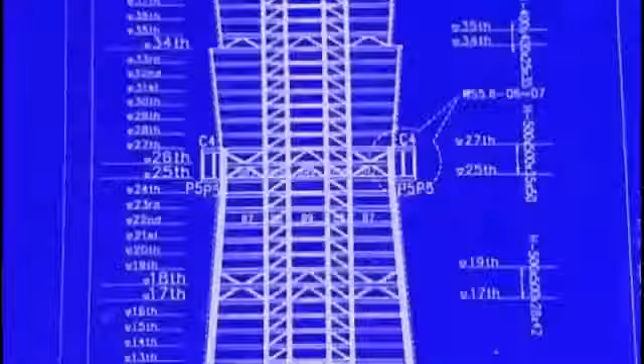Taipei 101, the world's tallest skyscraper. 508 meters of the most high-tech engineering and construction on the planet. Mixing ancient values with cutting-edge technology and taking the heart of Taiwan into the future.

Designing and building the world's tallest skyscraper is no easy task. But here in Taipei, two of the most powerful forces of nature, earthquakes and typhoons, combine to make going super tall a super challenge. I mean, any tall building in the world is a feat of engineering.

Using world-leading engineering and construction techniques, Taipei 101 not so much conquers nature, but outsmarts it. This is the only super tall building in the world that's designed in a seismically active zone. This has never been done before, certainly not to this scale.

The result is a man-made marvel, a unique megastructure of unprecedented size, shape and technology, built to withstand the very worst that nature can dish out. I, for one, I'm a structural engineer. If there's going to be an earthquake in Taipei, I want to be in this building. I'll choose this above all else.

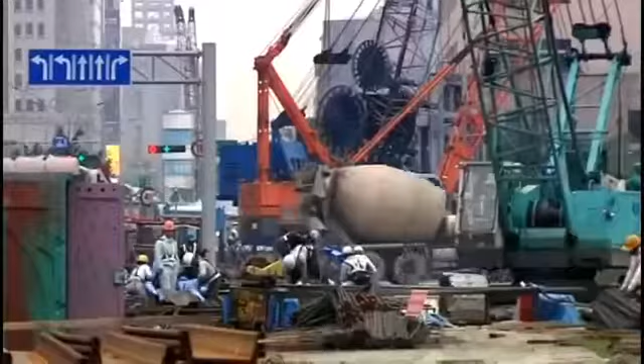If you're looking at the history of skyscrapers, really you begin in America; Chicago and New York are the classic cases. But in the last, let's say, 10, 15 years, Asia's really boomed with regards to the building of large structures. In recent years, Asia has seen an explosion of mega-scale building and industry. The region now holds 8 of the world's 10 tallest buildings. And as modern construction methods and materials continue to improve, designers will continue to aim ever higher. Not because they have to, but because they can.

Developer Harace Lin is one of the most powerful and successful businessmen in all of Taiwan. A member of a major construction dynasty, for him, Taipei 101 is the result of a lifelong ambition. Since I was a boy, I have dreamt that one day I would build a great building, one which will benefit later generations for a very long time.

For Harace Lin, Taipei 101 is more than just a building. It's a statement on Taiwan, its people, and its future. A notice to the rest of the world that Taiwan has the technology, the industry, and the determination not just to join the giants of global industry, but to lead them. There's no better way, really, of getting global attention than building these super tall buildings, particularly if it's the highest in the world.

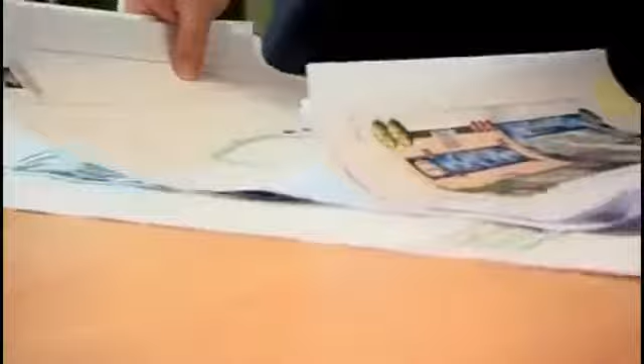Initially earmarked as the centerpiece for the growing and glitzy Xinyi district known as Taipei's Manhattan, the primary goal for the building is to be the best, but not necessarily the tallest. Long-standing friend of Harace, architect C.P. Wang from C.Y. Lee & Associates, comes into the project in the early stages. We started with 3 buildings, a 60-story building in the center and 2 smaller buildings that are about 20 stories for the different shareholders.

But plans quickly evolve as key investors clamor to have the building push up, not out. The planned 60 stories soon turns into 88. And with the mantle of the world's tallest a mere 13 floors away, the momentum becomes unstoppable. We truly believed we could do it. That if we worked hard, we could make a building that was visible to the entire world.

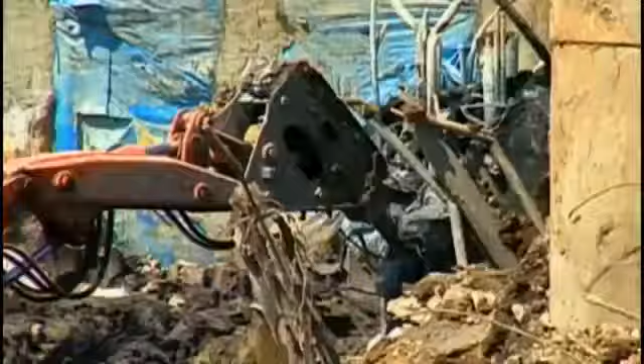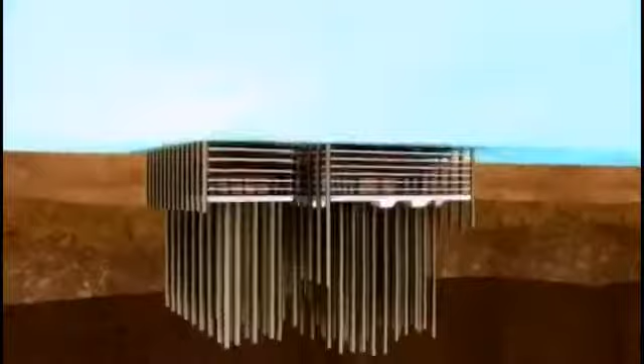But three factors combine to make this project not only the tallest and most visible in the world, but also one of the most difficult to build. Taipei City is an inhospitable place to build a skyscraper. Beneath the earth, a thick layer of soft clay demands uniquely designed foundations. While above ground, the threat of earthquakes and typhoons requires a level of engineering and construction never before achieved.

If Harace Lin wants to make the tallest building in the world here, his engineers and builders will have to confront the power of the earth. Designing a structure flexible enough to resist an earthquake, but stiff enough to resist a typhoon. Contradictory requirements that until now have never been combined. All these different mixtures of elements have to be blended almost superbly in order to make the building achievable.

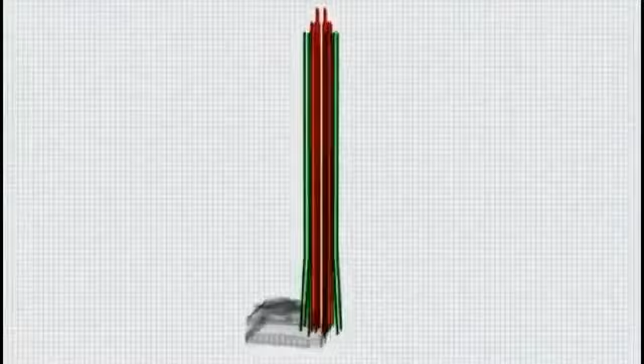The solution will combine two revolutionary systems. First, a braced megaframe joined to 8 super columns filled with a mixture of steel and concrete. And a tuned mass damper, a giant pendulum, the weight of 10,000 people, designed to oppose the effect of wind. The combination of these two concepts is groundbreaking. I am very proud of it, and as architect, you don't get a lot of opportunity to work on something of this magnitude.

Construction will take 6 years, 2,000 workers at any one time, and 700,000 tons of the most advanced steel and concrete ever made. These cost more than the national GDP of some countries. Yet despite all the investment, ingenuity, and determination of humankind, the forces of nature can strike at any time, whether you're ready or not.

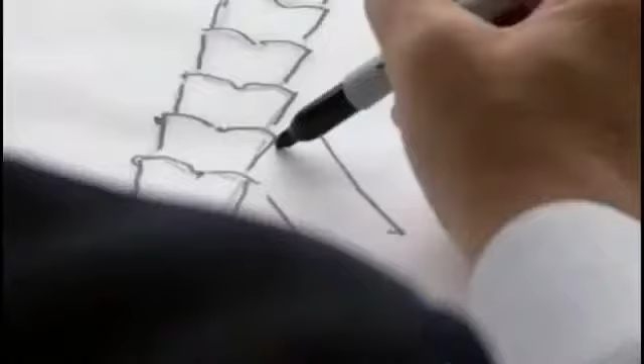Taipei 101 will be built to withstand earthquakes and typhoons, but it also needs to withstand the test of time. To be a true landmark, it must look unique. Its appearance mixes traditional Chinese icons, bamboo for strength and resilience, a pagoda for serenity, the perfect form of an open flower, and the luck and prosperity associated with the number 8.

We tried very hard to do something that we hope can represent the city, the island, as well as our culture. The result is this: 508 meters tall, 101 floors from ground level. A building that looks completely unique, but soon proves challenging to build. Every major skyscraper in the world is a trade-off between what will look good and what will stand up. For a tall building this height, you cannot escape the practical matters. It has to work.

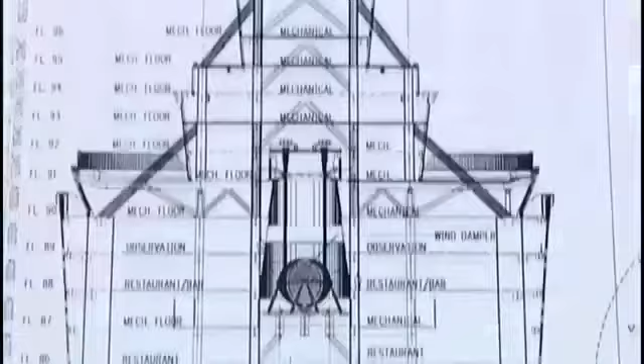Taipei 101 will be the tallest skyscraper on Earth. And the forces on a building of this scale are truly immense. Gravity forces it down, while wind pushes it sideways. Existence is a tenuous balance between being strong enough to stay up, but not so heavy as to cause collapse. Most skyscrapers have exterior walls that are either straight up and down or sloping in. But Taipei 101's unique shape sees much of its exterior surface sloping out.

Here at Evergreen Consulting, engineer Shaw Shi oversees plans that will translate Taipei 101's unique exterior into one of the strongest, lightest, and most resilient interiors ever made. The shape of Taipei 101 is more complicated than regular tall buildings, because simple and straight lines will be easier to work with.

Aesthetically, Taipei 101 is broken into sections resembling a stem of bamboo. But similarities with this fast-growing superplant don't end here. Just like bamboo, the distinct structural sections of 101 strengthen and support the whole building. Each section operates as an independent unit, transferring the building's massive weight away from the outside of the building and into the middle. The result is a stronger, lighter, and more flexible tower.

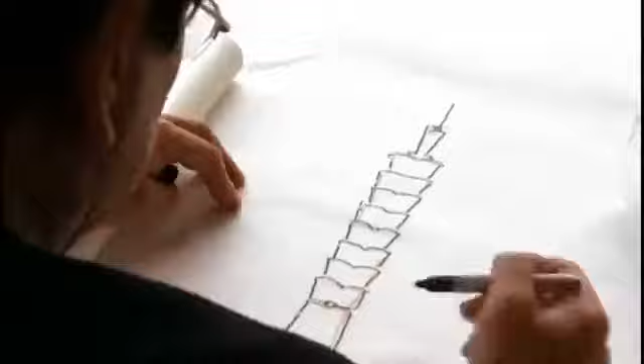For CP Wang, this sort of lateral problem solving has been integral to the success of the project. Their aim is not just to be the highest, but to be their innovative best. Let me put it this way, it's not like the Wright brothers when they invented the airplane. You know, today a lot of people know how to build an airplane, but it's how good it is that matters.

The design of Taipei 101 requires unique engineering to facilitate a unique shape. But the next challenge facing designers pushes this engineering to the limit. How to make the tallest building in the world stand up against two of the mightiest forces of nature in one of the most hazard-prone cities on Earth.

Every year, the people and buildings of Taipei are under attack from two of nature's most primal and unstoppable phenomena. When you put a tall building on an old secondary earthquake fault line, which runs nearby here, and in a place where you get significant typhoons, that just has major challenges. The problem is that to resist wind, a building must be stiff. But to survive an earthquake, it must be flexible. Taipei 101 will have to be both.

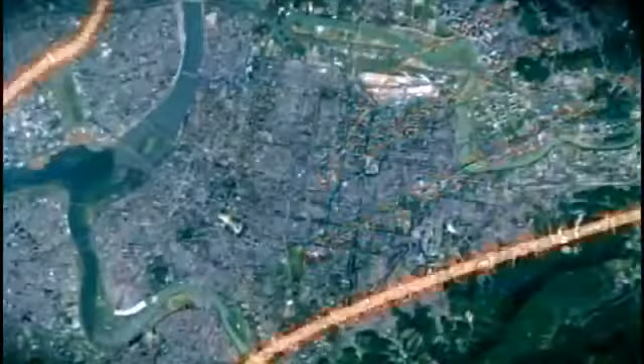This is the only super tall building in the world that's designed in a seismically active zone. This is really pushing engineering and construction boundaries right to the limit. The island of Taiwan sits at the junction of two tectonic plates, where vast plates of the Earth's crust grind together, causing earthquakes. The entire island is unstable. Three smaller faults run directly under Taipei itself, causing hundreds of earthquakes every year.

The effect of an earthquake on a giant skyscraper can be catastrophic. The entire building is shaken to its foundation as intense waves of energy from the Earth are transferred to every inch of the building structure. To withstand these shocks, the building needs to be flexible so it can move with a quake and not against it. If it's too stiff or brittle, it can break.

Superficial damage like broken windows or walls can be repaired. But any damage to the internal steel framework of a building can be a disaster. As the tallest building in the world, Taipei 101 must be engineered to withstand major earthquakes. But just how major is something of a mystery.

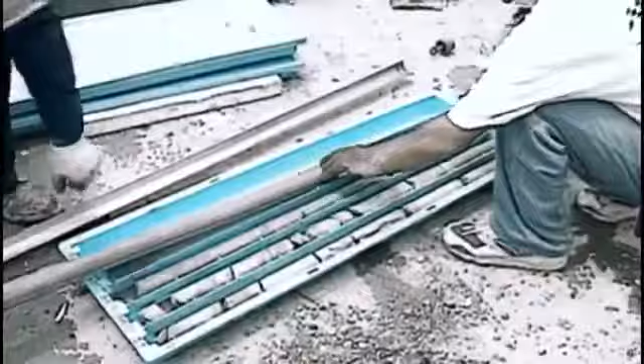Geologist Dunstan Chen is one of the scientists charged with finding out the details. This is when we make the first design, okay, we have to consider this fault. We know there's a fault somewhere here, but we don't know exactly where it is. An investigation is launched involving some of Taiwan's leading geologists to find out where the fault is and how far it is from the Taipei 101 site. They need to establish if it's active and how they should deal with it.

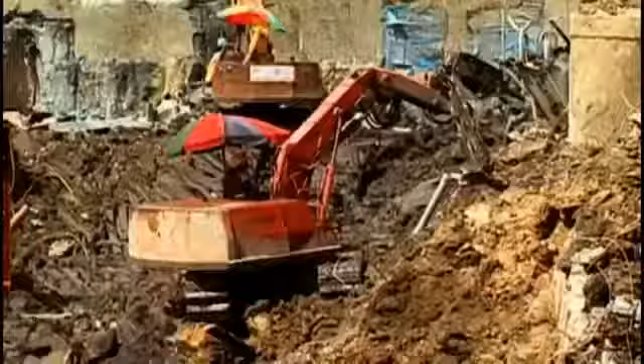The results shock everyone. Then we drill number 4. Okay, we encountered the fault. And this fault, actually, the gouge was around 10 meters thick. It's a huge one. In most earthquakes, the closer the building is to a fault, the worse the impact. The fault found by Dunstan and his colleagues is not only huge, it's close. Only 200 meters away from the 101 construction site. 101 must be prepared to face the most extreme earthquake shocks imaginable.

Here at the NCREE facility, scientists use a multi-dimensional shake table to simulate a variety of different earthquake scenarios. Scale models of different structural configurations are tested, and the information gained helps to design buildings that are better able to withstand the devastating impact of earthquakes. An earthquake shock delivers brutal vertical, horizontal, and twisting strain on a building. Every joint of every structural element is strained, and if there is one weak link, the whole lot can go.

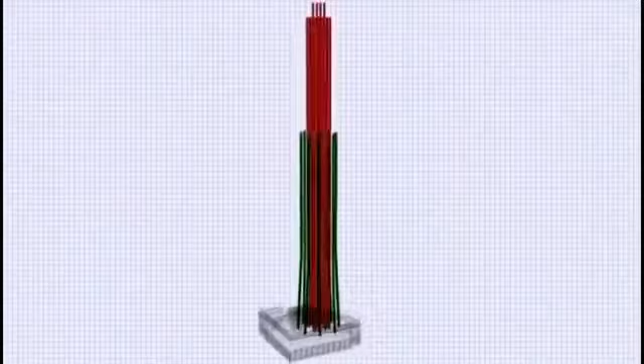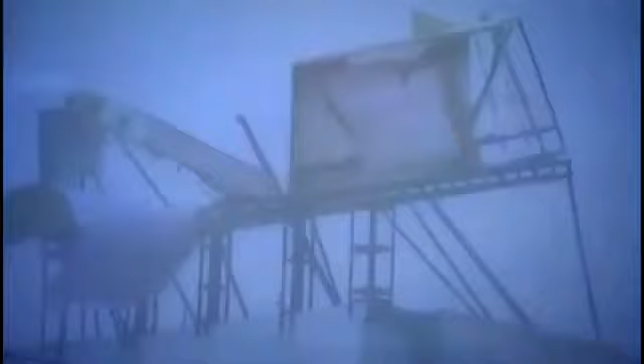To keep 101 standing in a major earthquake, engineers develop a complex internal megastructure. The central core of the building is connected to 8 incredibly strong supercolumns by a network of horizontal outrigger trusses. The supercolumns act like a giant flexible spine, enabling the building to flex and move if it needs to, but not break. Although the idea of supercolumns has been used in other buildings before, the size of 101 takes this engineering to an entirely new level. But the threat of earthquakes isn't the only natural force that builders of Taipei 101 have to worry about.

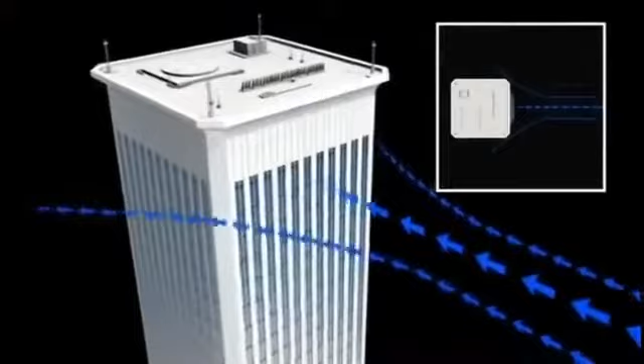Every summer, unstable equatorial air off the coast of Taiwan generates vicious typhoons that lash Taipei. These intense tropical storms, with winds of up to 200 kilometers per hour, can literally blow a building to pieces. But it's not just strong winds that designers of 101 have to worry about. The surface area of a skyscraper is so huge that even a small breeze can still have a major effect. As wind hits a building, it impacts in 2 ways. First, the exposed face of a building can be pushed by the wind like a giant invisible hand.

But under certain conditions, the wind can generate pulsing vortexes on opposing sides of the structure. The vortexes begin to oscillate, exerting small but consistent pushes on alternating sides of the building, eventually causing it to sway. Like a child pumping their legs on a swing, each gust of wind adds energy. This swaying can be so severe that occupants of high-rise buildings can experience motion sickness.

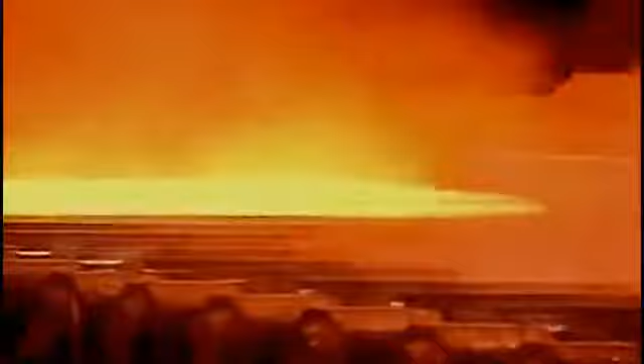Normally, engineers can accommodate this problem by making the internal structure of a building stiff and rigid. But being stiff is exactly what designers don't want in the event of an earthquake. Can engineers of 101 design a building that is both stiff and flexible at the same time? For the project to go ahead, they have to.

Taipei 101 is so massive that finding ways to minimize the effects of wind is a vital element of its design. Engineers and scientists begin with the building's exterior. They find that by using re-entering or saw-toothed corners, the flow of wind around the building is drastically reduced. The results of wind tunnel testing show the re-entering corners help to reduce the dynamic wind response by 30 to 40%.

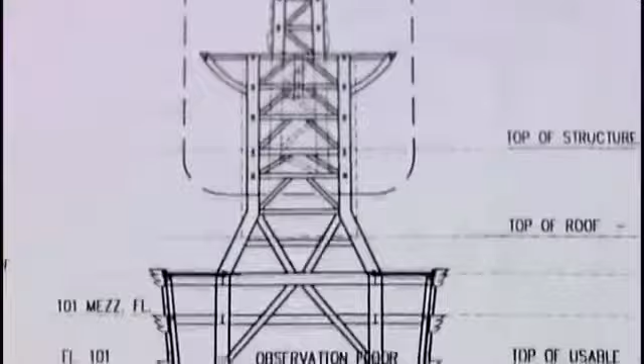Saw-toothed corners on a building hinder the formation and impact of the small wind vortexes that can cause it to sway. But just like the pumping of a child's legs on a swing, where each push adds energy to the last, even when the effect of wind on a skyscraper is reduced, energy will continue to gather unless it's removed. It's not the size of the push that matters, it's the repetition. If engineers can find a way of canceling this accumulation of energy, then the building's contradictory requirements of strength and flexibility will finally be met.

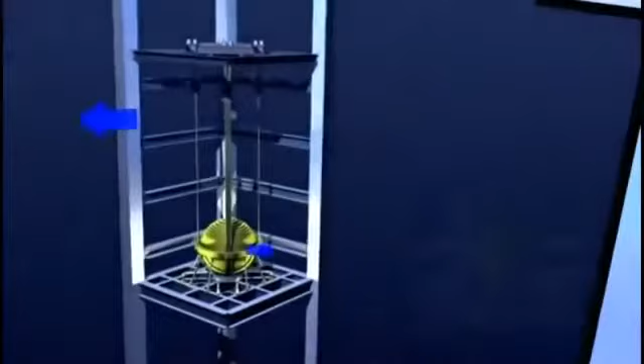Usually, a lot of tall buildings use so-called computer-controlled mass to do that function. In our case, I think our very smart engineers came up with this passive tuned mass damper. The passive damper on 101 uses a huge weight hanging from an upper floor to counter the effect of wind. As Taipei 101 sways in one direction, the tuned mass damper swings in the other, cancelling the buildup of energy and reducing the building's motion.

Engineers of Taipei 101 have made the impossible possible, designing a building that is stiff enough to survive a typhoon, yet flexible enough to survive an earthquake. But although these ideas seem to work on paper, they are yet to be proven in practice. 101 is going to need a lot more than just new design to combat nature. It's going to need entirely new materials and construction methods as well.

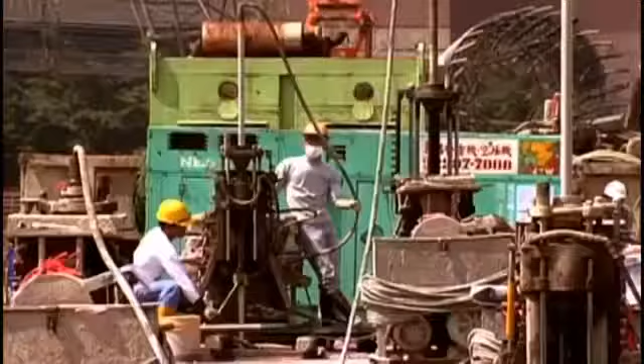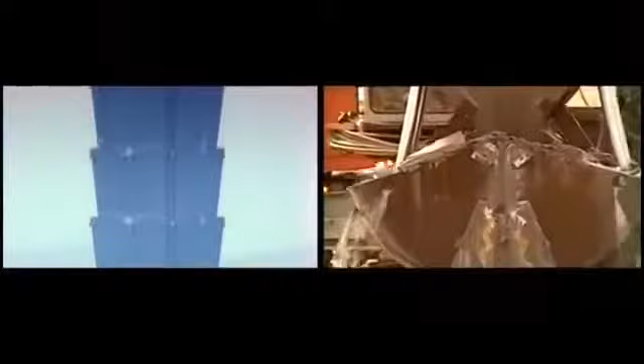Taipei 101's unique megastructure and wind damper will make the building resist the impact of earthquakes and violent storms. But all of this engineering means nothing unless the giant building has a solid foundation on which to sit. Finding solid ground in Taipei is a lot harder than it sounds. Over hundreds of thousands of years, changing sea levels have filled the Taipei Basin with layers of soft, unstable silt and clay. In order for the tallest building in the world to remain standing, its foundations must penetrate through this layer, sometimes 60 meters thick, to find the solid bedrock below.

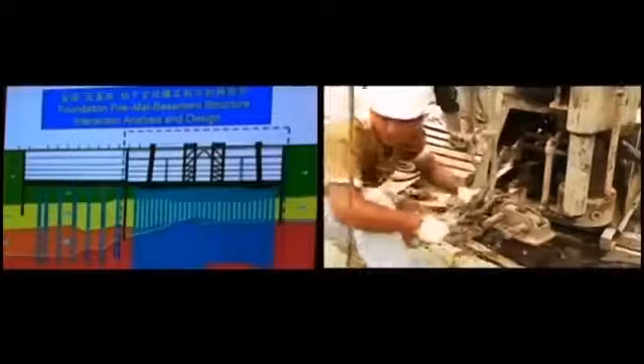Geotechnical engineers spend 8 months collecting core samples to analyze the soil on the building site. They find 3 distinct layers of soft sediment before finally reaching solid ground. This information helps designers to develop detailed plans for 101's foundation structure. Preparing the foundations takes 15 months and removes 700,000 tons of earth from the site.

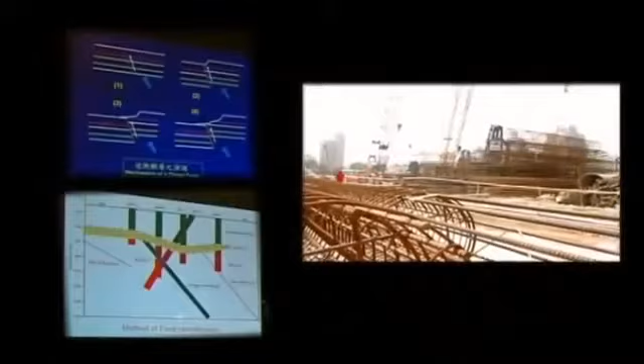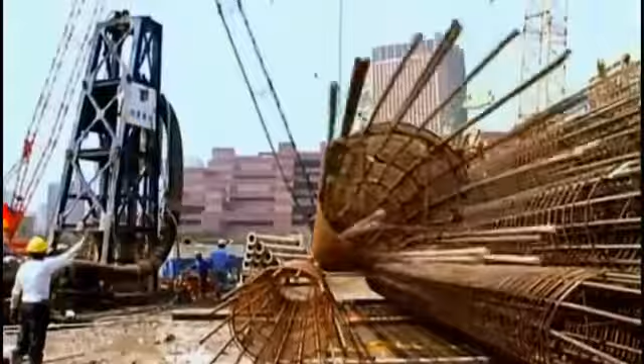The foundation of a skyscraper is one of its most vital structural elements. It must distribute the building's enormous weight evenly below ground, at the same time creating a super strong base for the towering megastructure above. That's the key point for the whole building, that the building can stand up into the sky. To compensate for the inherently unstable ground of Taipei, 101's foundation is designed to literally pin the building to the deep layer of bedrock below.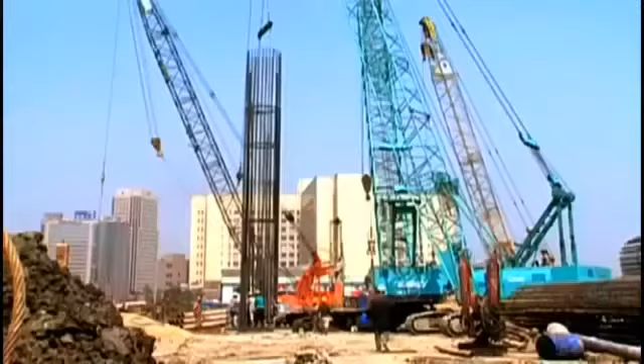A 23,000 cubic meter concrete slab sits on top of a complex system of 382 reinforced concrete piles. These piles transfer the building's weight and structure deep into the bedrock, meaning 101 is more than just resting on the earth. It's fused to it. This unique foundation, combined with 101's mega frame and damper, give the building an extraordinary earthquake safety rating that exceeds even that of Taiwan's nuclear power plants.

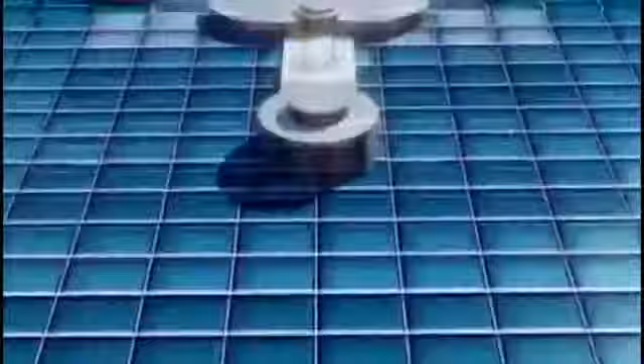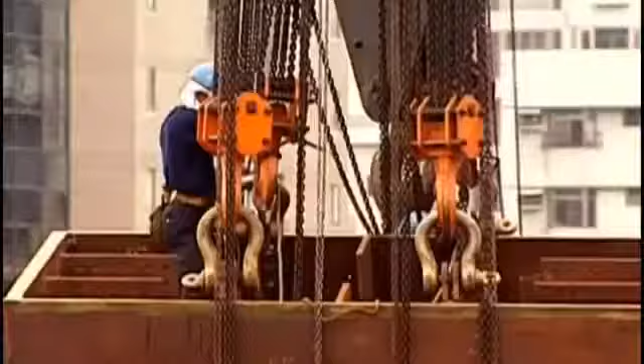Inside the 101, during an earthquake, you watch out for the falling particles, okay? Rather than worry about the falling of the building. Taipei 101 will not just be one of the strongest and most stable buildings in Taiwan, but one of the strongest and most stable buildings in the world. Building on the main megastructure begins in September 1999. If I look back, I feel it was more difficult than I expected. But I didn't feel that way when I was working and solving the problems every day. This isn't a construction workforce, it's a construction army.

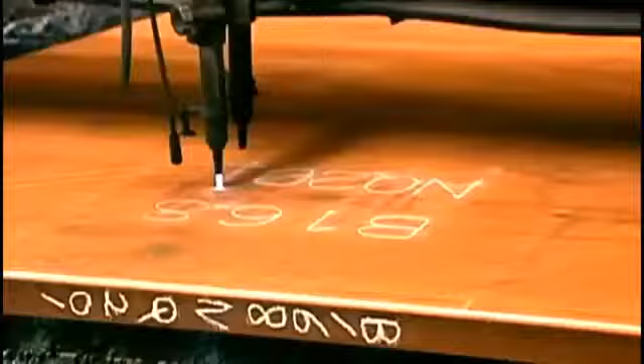Here at the Kaohsiung China Steel Plant, some of the most high-tech steel manufacturing techniques in the world are being used to build the various elements of 101's groundbreaking megastructure. The basic idea of this building is so-called double tube structures, which means we use the steel frame to create the outside tube, and then we use the steel frame and the concrete columns to create inner tubes.

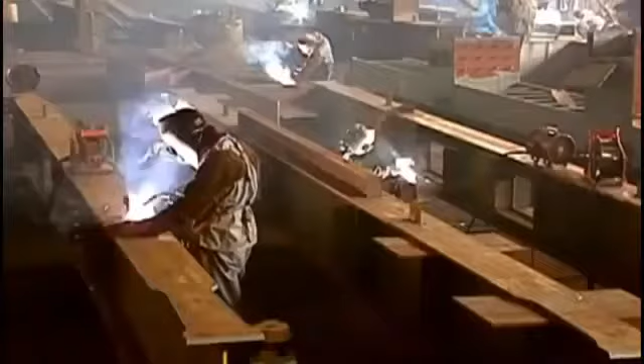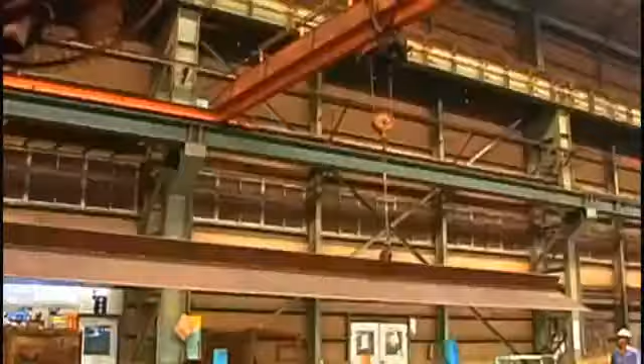The steel used in Taipei 101 needs to be soft enough to weld, hard enough to carry the building's awesome bulk, and pliable or bendy enough not to weaken or break if it's rattled by an earthquake. Each of these requirements demands a different type of steel, a complex chemical cocktail of carbon, alloy, and refined iron. More carbon makes it stronger, but too much and it becomes stiff, brittle, and hard to weld. The Kaohsiung plant develops 5 different kinds of steel for 101, each with a specific flex-to-strength ratio designed to suit its purpose and position in the building.

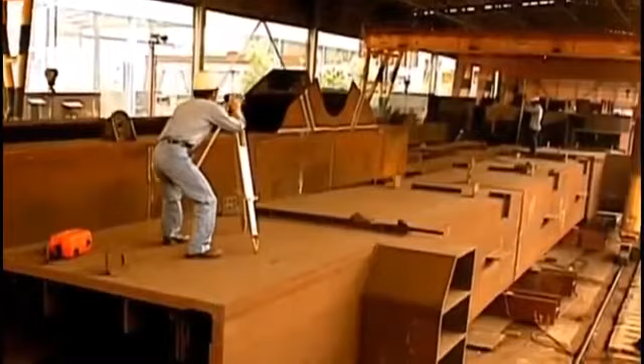The challenge for manufacturers is to make perfect steel into perfect components for 101 each time, every time, day after day. Starting with the raw materials, massive blast furnaces push out 10,000 kilogram ingots of refined steel.

The ingots are near liquid hot, 1200 degrees Celsius. An elaborate system of hot rollers and purification baths torture and squeeze the giant blocks into 90mm thick flat plates. Precision, control, and consistency are crucial. Any imperfections mean weakness, and any weaknesses could be fatal for the mighty 101 megastructure.

Patterns, ID numbers, and cutting are all controlled by computer. This plant uses more electricity every day than a small city. From start to finish, each super column box section takes 4 months to make. The final product is big enough to park a car in, weighs as much as 90 tons, and is as tall as a 2-story building.

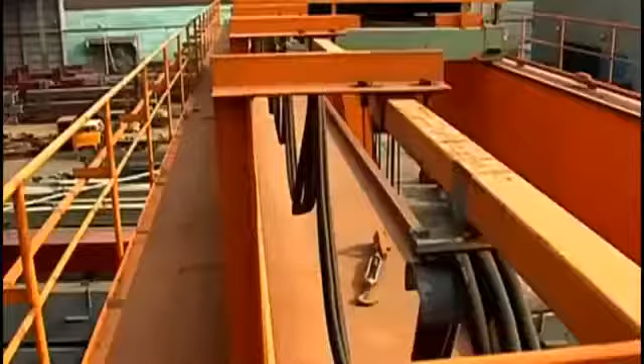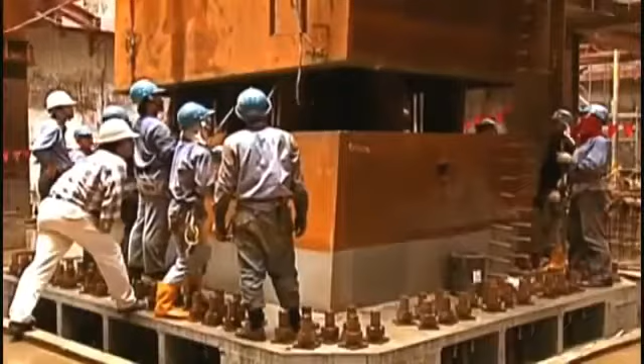Each of 101's super columns will need more than 50 of these box sections. That's more than 400 for the entire building. The next challenge facing builders will be to put them together. The integrity of 101's megastructure requires the super columns to act as single units. But joining 50 90-ton box sections into one seamless unit has never been done before.

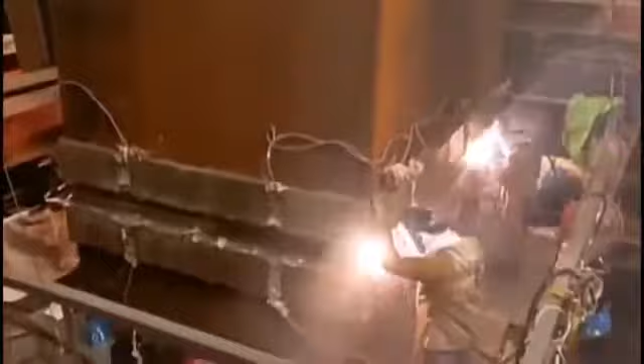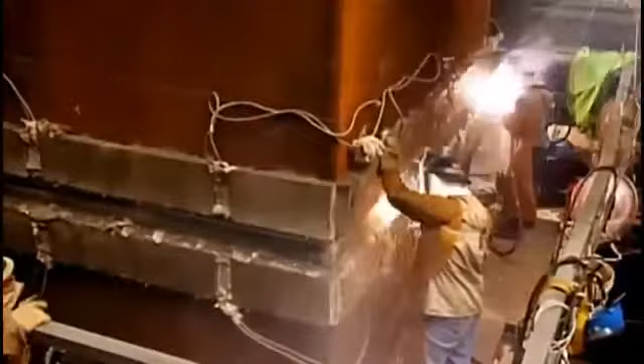Yet again, 101 will tread new ground. Ordinary welding techniques simply won't cope with the enormity and detail of the task. Every millimeter of every join requires absolute perfection. Teams of 6 welders work simultaneously. The entire girth of each join has to be heated for the welds to bind. The scale of the task is mind-blowing. Each join takes at least 14 hours to complete. That's nearly 2 years welding in the super columns alone.

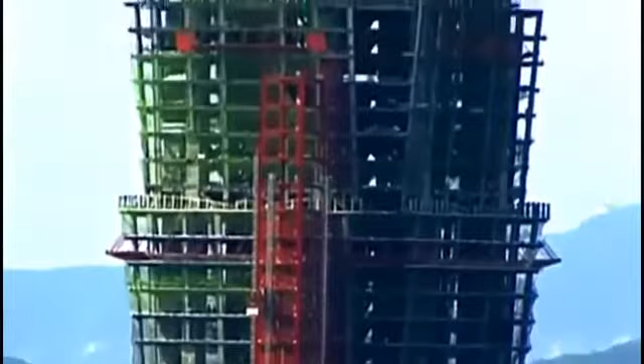The high-strength steel and advanced welding techniques used in 101's super columns give the building a strong and flexible backbone built to withstand the shock waves of a severe earthquake. But dealing with the building's incredible weight demands an entirely different type of strength, one that steel alone cannot provide. A building usually has 2 types of force, the tension force and the compression. And we all know steel works better for tension, and concrete works better for compression.

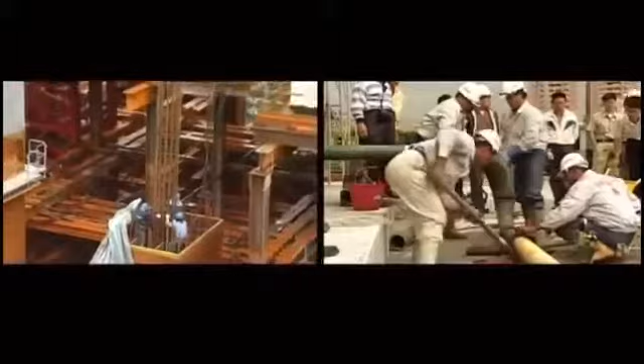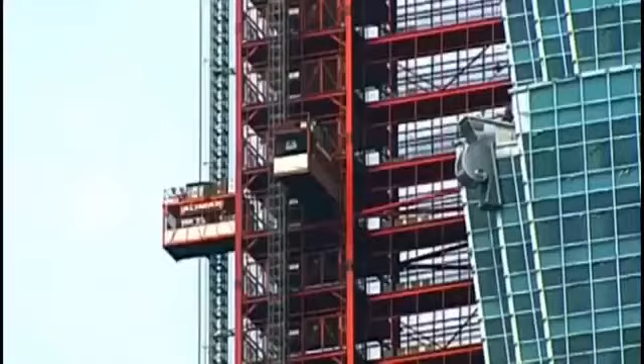The awesome weight or compression loading on the world's tallest structure would crush the super columns if they were hollow. But filling them with concrete to the 62nd floor combines the tensile strength of steel and the awesome compression strength of concrete. Making the system even more robust, engineers develop a concrete mix that is 60% stronger than normal. Concrete able to withstand an awesome 10,000 pounds per square inch of compression. The combined benefit of steel and concrete gives 101 the strongest, lightest, and most flexible backbone of any skyscraper on the planet. A backbone that is about to be put to the ultimate test.

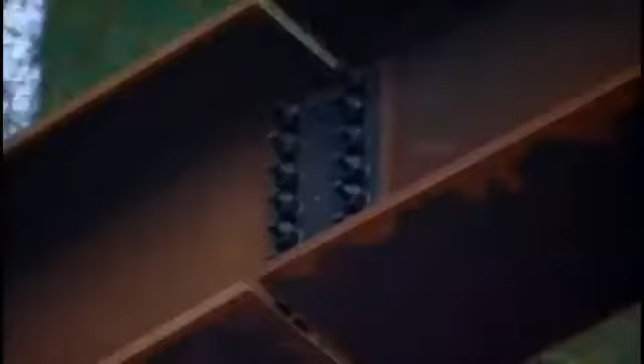2:52 p.m., March 31st, 2002. A magnitude 6.8 earthquake rocks northern Taiwan. The entire island is brought to its knees. And in Taipei, only 135 kilometers from the quake epicenter, over 100 houses are destroyed and at least 5 buildings collapse.

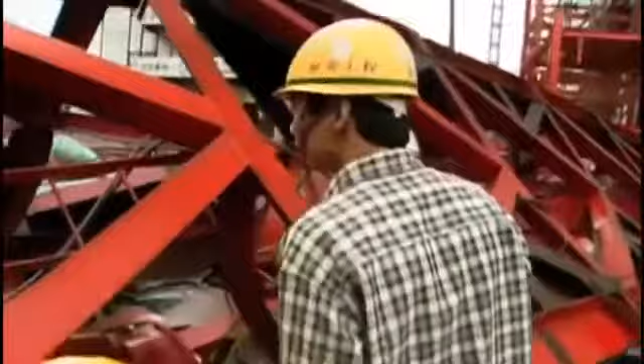The quake wreaks havoc on the construction site of 101. 2 purpose-built cranes topple 240 meters to the ground. 5 workers are killed and dozens more injured. A taxi driver fleeing his vehicle is crushed. Taipei is a disaster zone. All work on the building stops as aftershocks continue to strike. Insurance disputes rage, and engineers and surveyors check the massive building for hidden structural damage.

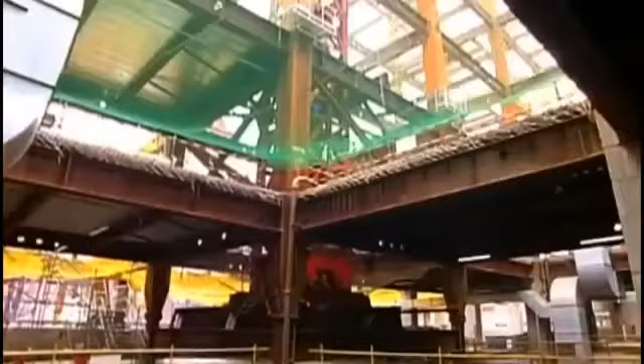It was a big challenge for me at the time. The 9/11 attack had happened in the USA just before. And so our people and our investors began to question whether we needed such a tall building in Taipei. The work ban continues, not just for days or weeks, but for 3 months. An earthquake, the very force 101 has been designed and built to survive, now threatens to destroy the building's future. Not physically, but financially. Morale plummets, and a dark cloud hangs over the project.

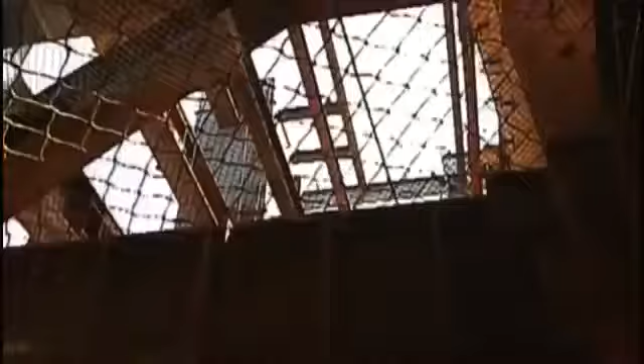Finally, in July 2002, the building surveyors give 101 a clean bill of health. The internal framework is intact, and once more work can resume. But the victory is bittersweet. No scientific test could have proven so effectively that 101's megaframe can resist a severe earthquake. But no scientific test would have come at so great a cost. The notorious March 2002 earthquake has put 101's megaframe under the most extreme test imaginable.

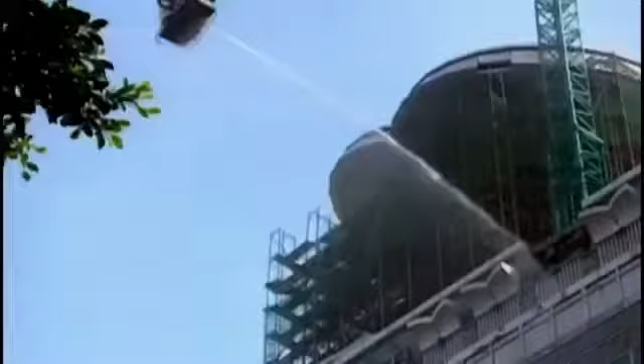But as work resumes and the skyline of Taipei is increasingly dominated by 101, a geologist from a prestigious local university discovers a worrying combination of data. Although only one severe earthquake has struck Taipei since work on 101 began, there has also been an unusually high number of smaller ones. Taipei 101 might not just be the victim of recent quakes, it might be the cause. When the second earthquake occurred again, almost in the same location, then I took it very seriously to do some research work.

The fact that Taipei is a seismic hotspot and that 101 is built only 200 meters from a dormant fault line is common knowledge. But the powers of the Earth are often hidden. And despite the combined effort of geological scientists the world over, accurately predicting when and where an earthquake will strike is beyond us. Dr. Lin believes the enormous weight of 101 may have reawakened Taipei's dormant fault lines, increasing the threat of earthquakes, not just to the building itself, but to the entire city.

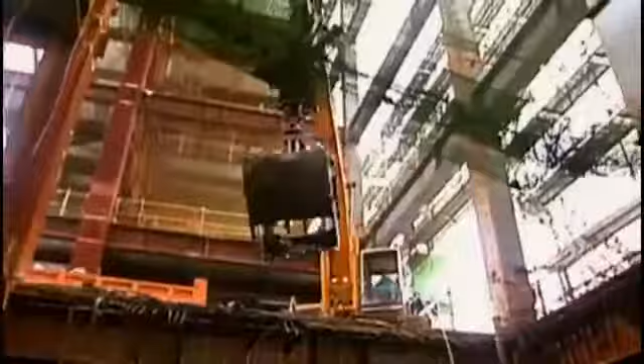Although Dr. Lin cautiously states that this theory is not yet scientifically proven, the circumstantial evidence seems compelling. Bigger earthquakes, and more often, since the construction of Taipei 101 began. But foundation engineer Dunstan Chen explains why he believes this hypothesis is fatally flawed. That's actually at the beginning.

For every high-rise building I built in Taiwan, we consider that the weight of the structure, okay, should be more or less equivalent to the soil you excavated. The net change in pressure on the Earth as a result of 101 is nil. 700,000 tons of construction has gone up, but 700,000 tons of earth was dug out to build it. The unpredictability of seismic activity means that either way, we may never know for sure. And regardless of what causes the frequent earthquakes in Taipei, this man-made marvel is being built to withstand them.

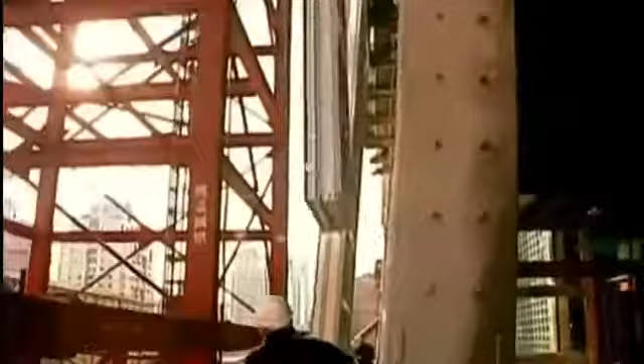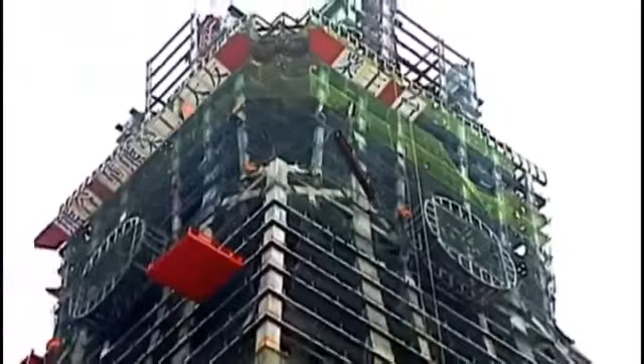On the construction site of any super tall building, the difficulty of getting materials up to the action is one of the greatest logistical challenges. The primary tool for this on 101 is a series of 6 self-erecting construction cranes. The biggest, strongest, and most advanced on the planet, these cranes are able to shift thousands of tons straight up in a single day. But their most ingenious feature, and the one most crucial to the construction of a mega skyscraper, is their ability to self-erect, to grow with the building around them.

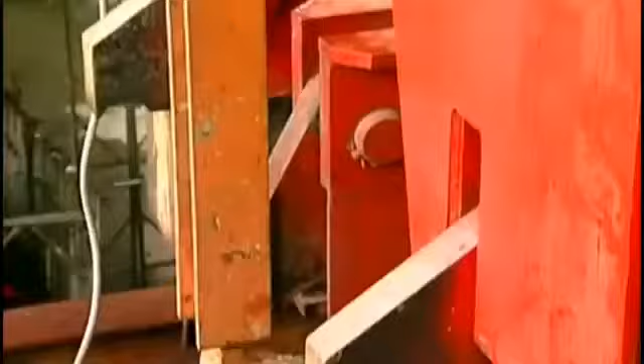To do this, powerful hydraulic rams lift the entire top mechanism of the crane. A new tower section is then placed in the gap, cross members secured, and progress resumes as normal with almost no interruption to workflow.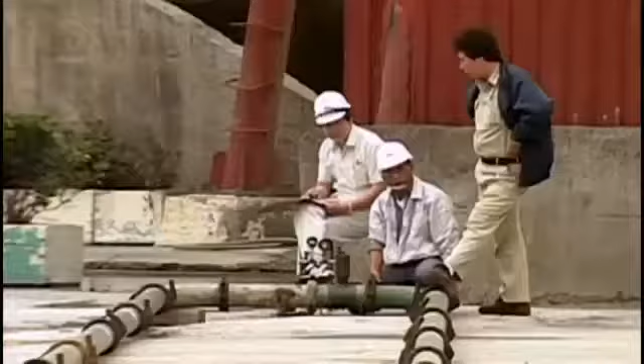Although concrete is one of the oldest and most widely used construction materials, it's incredibly heavy and, like a liquid time bomb, has to be pumped into position before it sets. These two factors pose a major challenge for construction workers on 101. The concrete they use here doesn't just have to get from the plant to the building, it has to get up the building as well. Once you leave the batching plant, within 2 or 3 hours, you have to arrive on site and start pouring.

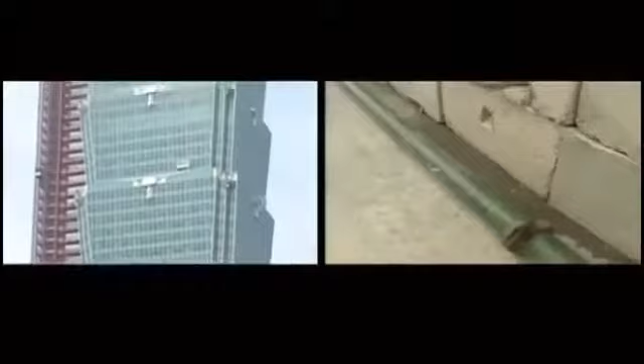To do this, engineers develop concrete with specific levels of viscosity or runniness and specific drying times. This buys them valuable time and helps the powerful concrete pumps to work more efficiently. The result is yet another world record for 101. Concrete is pumped from ground level to 450 meters. That's higher than any other concrete pour in history.

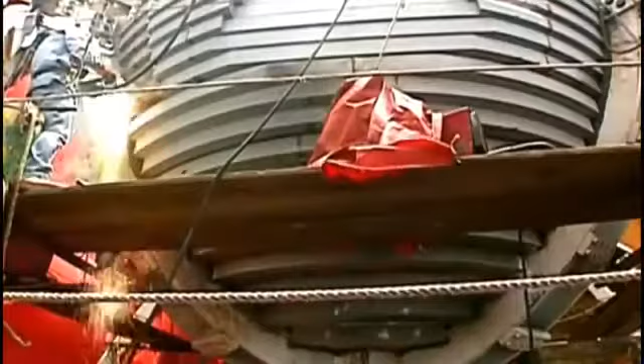Construction reaches the 92nd floor in July 2003. Although nearing completion, the technological crown jewel of 101 is yet to be put in place. The tuned mass damper, the crucial windproofing mechanism designed to counteract the horizontal sway of 101's massive bulk. Although mass dampers have been used in skyscrapers before, they've never been this shape, they've never been this big, and at 380 meters, they've never been this high up. To be effective, the damper needs to be 1/10 of 1% of Taipei 101's total mass, a staggering 660 tons.

Not even the awesome Taipei 101 cranes can lift something this huge and heavy. The ball arrives in prefabricated sections, which are then welded together on site. It's then hung from 16 10-centimeter thick cables and tuned to make it swing in exactly the opposite direction to the building. When the building moved by the wind, it would go against it and balance it out real quickly, very much like the shock absorber of a car. And I think this idea has not been used in any other building that I know. So I think we're the first one to try that.

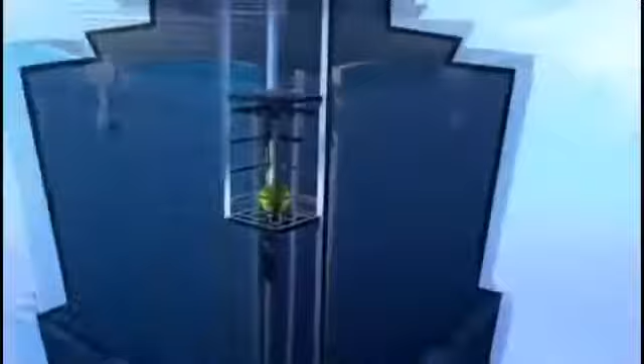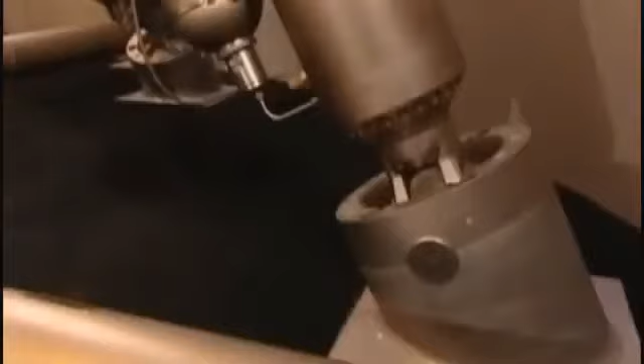In principle, it works like a simple counterbalance. But in reality, things are a little more complicated and a lot more clever. To stop the damper from rocking either excessively or out of sync with the building, the ball is attached to a series of hydraulic dashpots, like mega shock absorbers, that stifle the ball's movement. If the damper experiences a particularly sudden jolt, such as an earthquake, the hydraulic resistance in the dashpots is strong enough to create a lockdown effect, meaning that the big golden ball in the sky will stay exactly where it is.

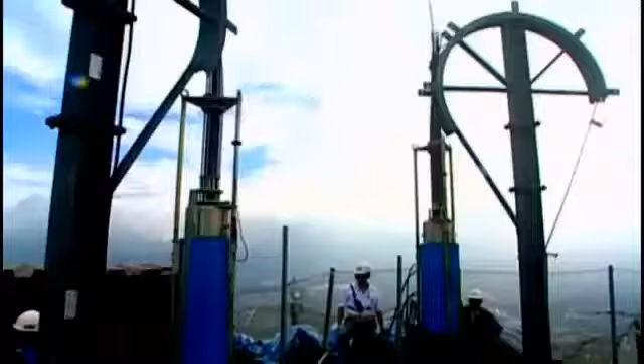If the mass damper is the technological crown jewel of 101, then the 60-meter pinnacle at the very peak of the building is the aesthetic equivalent. By late 2004, all major structural work has been finished on the main body of 101. Although this marks the successful completion of one of the most remarkable construction endeavors ever attempted, 101 is still 4 meters short of being the tallest building in the world.

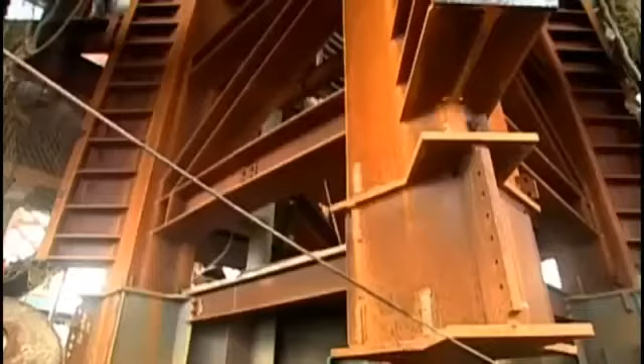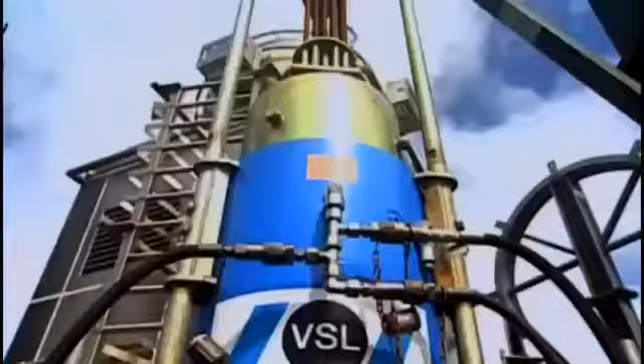Successfully raising the pinnacle will assure them the title, but at 400 tons, it will also be a logistical nightmare. Nothing this heavy has ever been lifted in this way at this height. It's not just difficult, it's dangerous. A system of hydraulic jacks and geared cables lifts the massive structure from its base. Progress is painfully slow, but victory is the only option.

Finally, after 14 days, the pinnacle is secured. Against all odds and against nature, the tallest building in the world is complete. Yet although this marks the end of one phase of the building's life, it is the beginning of another.

Today, some of the world's biggest corporations boast offices here. And in peak periods, up to 40,000 people come in and out of the building every day. It's like a city unto itself, only vertical. For a lot of people, until you see it, you don't believe it, nor do you understand it. Many of the everyday functions we take for granted are complicated exponentially by the addition of height, making the operations of this mega skyscraper a mega challenge.

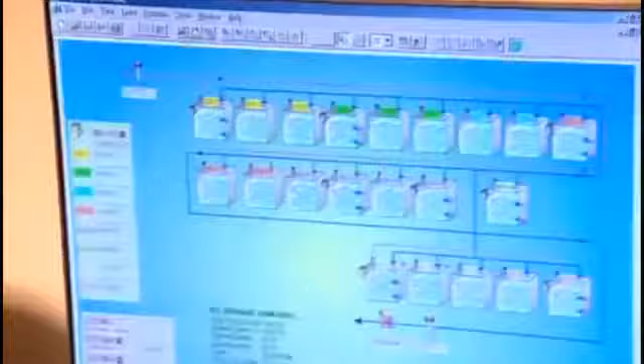Every minute detail of the building is monitored and accessed in here, the central control room. From the speed of every fan on every air conditioning duct to each of the 96 elevators, Operations Manager Jeff Shu and his staff can see and control it all. The security section monitors the focus, angle and zoom of each of 101's 520 surveillance cameras. The locks on even the most obscure doors are hardwired into the vast central brain of the security system.

Staff continuously monitor the use and supply of electricity, the flow of water, the fire hoses in the mall, even the level of seismic activity. Every visitor is photographed and checked twice without them even realizing. It sucks in the equivalent energy as 6,000 regular homes. It's dependent on 2 designated city substations and has backup generators in case of failure. There's enough electrical cabling in 101 to stretch from Taipei to New York and back again.

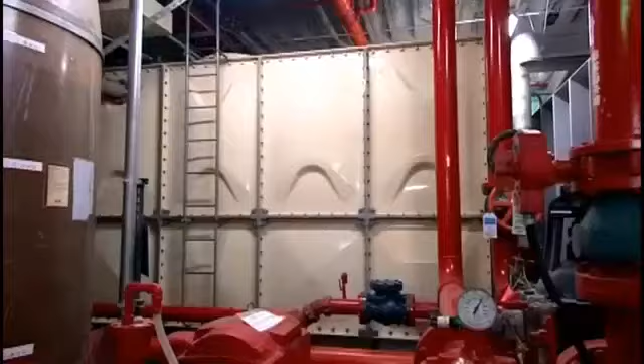In case of fire, the equivalent of 2 Olympic-sized swimming pools of water is stored within the building to fuel the vast array of sprinkler systems. Stairways and corridors leading to the mechanical floor safety zones are pressurized to reduce smoke levels and are equipped with personal emergency kits, closed-circuit TV, and, perhaps most importantly, access to the outside world.

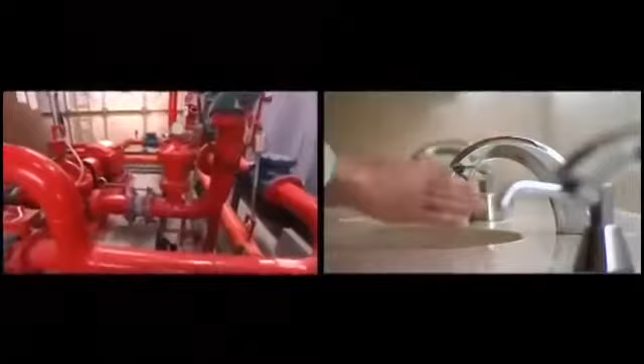On a building of this height, matters as simple as flushing a toilet pose serious challenges. 1 liter of water falling from the top floor of 101 will have the same impact as a house brick traveling at 65 kilometers per hour. Sewerage tanks on every mechanical floor contain, process and transfer grey water safely to the ground.

The elevators are the fastest in the world. Traveling at 60 kilometers per hour, they go from level 5 to level 89 in only 37 seconds. Each carriage is pressurized to avoid ear damage, streamlined to minimize noise, and electronically balanced to ensure a ride so smooth that even a coin won't topple on the incredible journey.

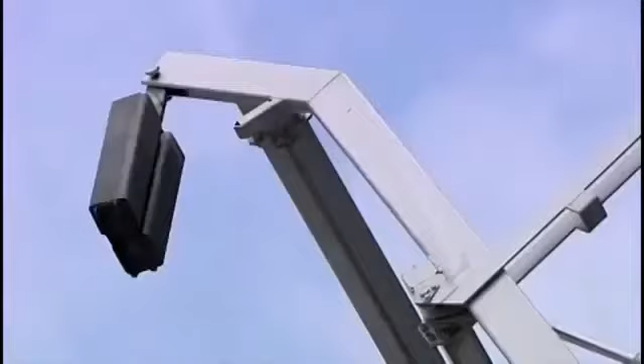To clean each of 101's 17,000 windows, custom-built gondolas dangle workers off the edge of the building. They can only work when the wind is under 10 meters per second. And even then, the cables have to be hooked into the walls to stop the gondola blowing off track. The awkward angle of 101 means that an elaborate counterweight system has to be used so that workers can get close enough to the walls to work. To clean the entire building takes 4 teams of 2 workers 3 months. The job is so big that as soon as it's finished, it's time to start again.

Inside and out, Taipei 101 pushes the boundaries. A unique-looking building that has changed the face of construction, design and engineering forever. The tallest building in the world, in one of the most hazard-prone places on the planet. Defying the powers of earth and wind, to go where no building has gone before.

It's really a very, very important building. It is a landmark, a benchmark. Long after its mantle of world's tallest has gone, its achievement will remain. A symbol for the future of a proud island. A skyscraper that took on nature and won.